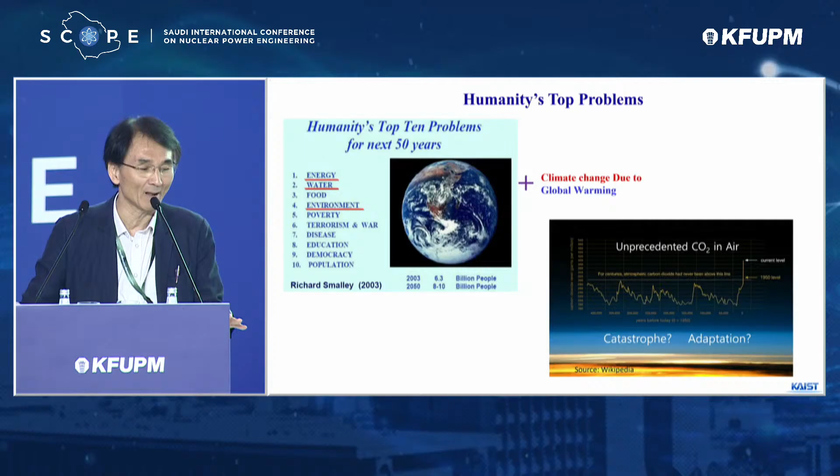So let me begin with the top 10 humanity's problems. As you understand, energy is the biggest problem and issue in the whole world, and the global warming we have nowadays is making it more complicated and more challenging. In addition, people say global warming is triggering huge climate change. I'm not going to discuss this because I'm not an expert here, and also some people say this is quite controversial. But looks like global warming is truly happening, and we have to worry about climate change.

So, in the middle of combating climate change and global warming, many countries are paying big attention to nuclear energy again, announcing, for example, more than 30 countries are trying to triple their nuclear installation. Tripling, not doubling. And more interestingly, the USA announced they will quadruple the nuclear capacity in the US alone. This is a huge challenge, I believe. And believe it or not, every year in China they are adding about 10 big-size nuclear power plants to the grid. I say 10. So it looks like a nuclear renaissance is really coming again.

And the European countries are returning to nuclear, well, except Germany. Hopefully Germany may also change their mind. And the big tech companies in all countries, I believe, but largely in the US—Microsoft, Amazon, Google, and even Meta—they are investing a lot of money in nuclear projects and in nuclear business areas to develop AI and also to construct data centers.

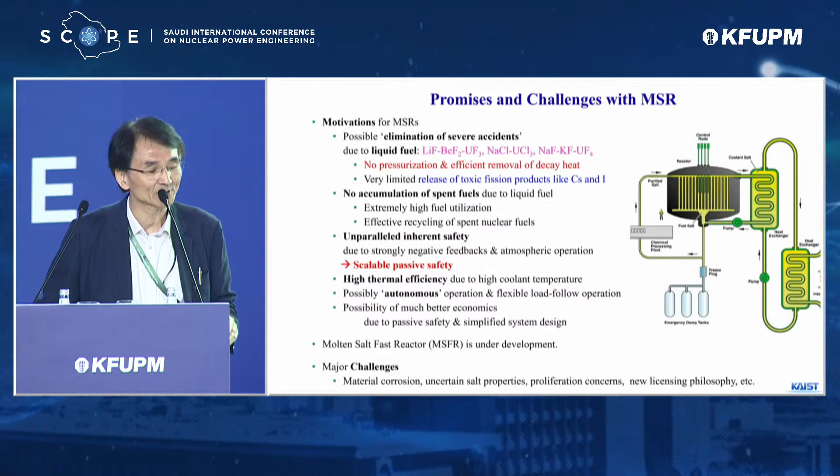If you look at some advanced molten salts, like chloride salts, we need more knowledge about the thermochemical properties of the pure salt itself. It's ongoing research, and there are some concerns in terms of proliferation and operation. So we have to make sure the system design is very much proliferation resistant.

Let me recall a milestone and crazy experiment people did about 60 years ago at the MSRE system in the US, Oak Ridge National Laboratory. They built an experimental molten salt reactor, 8 megawatt thermal, and they made the reactor prompt critical suddenly.

There are a lot more examples, but I cannot discuss all of them today.

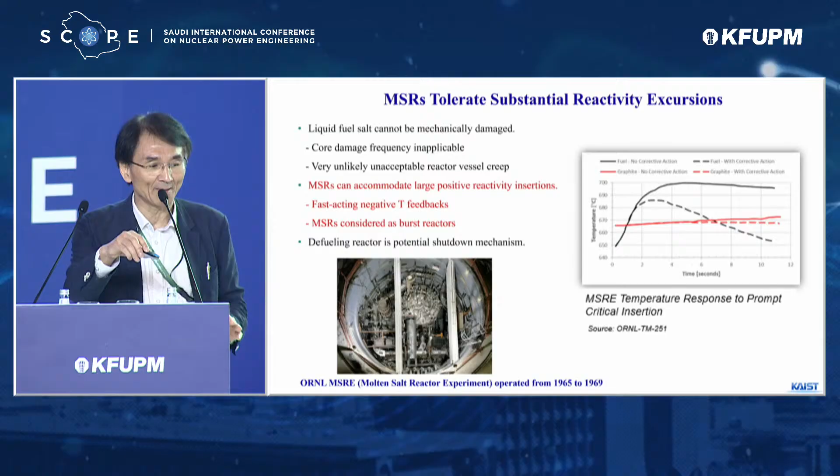The molten salt reactor is basically a thermal spectrum reactor. However, if you recall the requirement I mentioned today, thermal spectrum is not a good idea because we have to make it sustainable, and very effective in terms of resource utilization. For that, it should be a fast reactor.

For the molten salt fast reactor, we need a new salt fuel, which is chloride, not fluoride. Because in the chloride salt, the uranium solubility is much bigger, and we can achieve a much higher conversion ratio. That means we can utilize the spent fuels very nicely. I will show you.

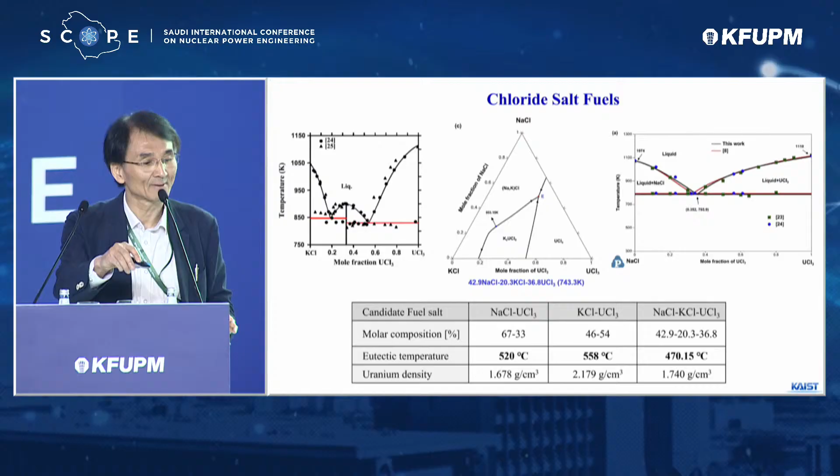Now I will show you our research outcome. We are working on molten salt fast reactor with a closed fuel cycle over the years. My student is just trying to publish this in a journal.

Let's think about the energy potential of the 20,000 tons we have in Korea. If you convert all of this spent fuel into energy, it should be equivalent to the total electricity the whole of South Korea used over 300 years. I say over 300 years—we don't need any natural uranium anymore. And in the US, it can be several hundred years worth of energy resource for the whole country. It's really huge. Fortunately, in the molten salt fast reactor, we can utilize all the spent fuel.

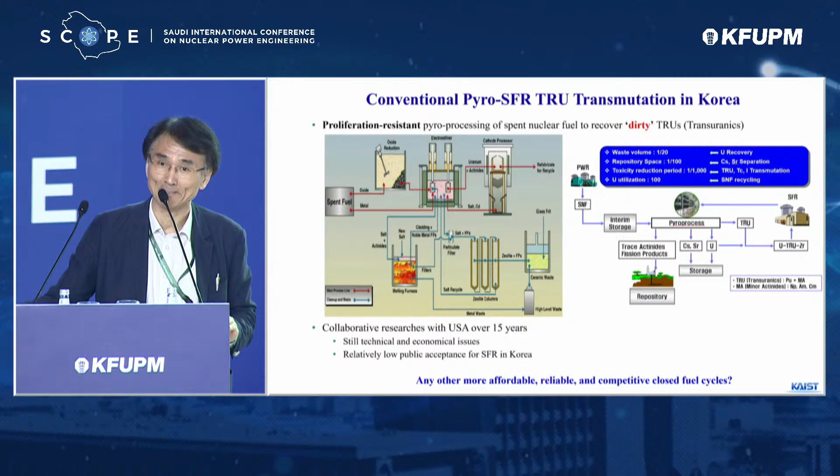So in my idea, we do this way: the LWR spent fuels will be pyroprocessed, and this pyroprocessing will be much simpler than the conventional one I just introduced because we don't need pure TRU. We don't want to just incinerate the TRU - we will try to use this as the fuel for the break-even molten salt fast reactor. So the TRU fraction is only about 15%.

This is necessary only for the very initial molten salt fast reactor, so that way we achieve initial criticality. Once we achieve initial criticality, we don't need TRU anymore because this molten salt fast reactor is supposed to be break-even. What I mean is, in the middle of operation, the fuel is self-generated, so we don't need any fissile fed from outside.

Instead, we just feed dirty spent fuel after reduction, and that is truly extremely proliferation resistant pyroprocessing of the spent fuels. In the middle of operation, we feed a small amount of spent fuel, for example 3 kilograms every day if the reactor is 3 gigawatt thermal, and we have to remove some fission product because to get to the equilibrium cycle, if you think about mass balance, A comes in, then A should get out - so the same amount of fission product should be removed.

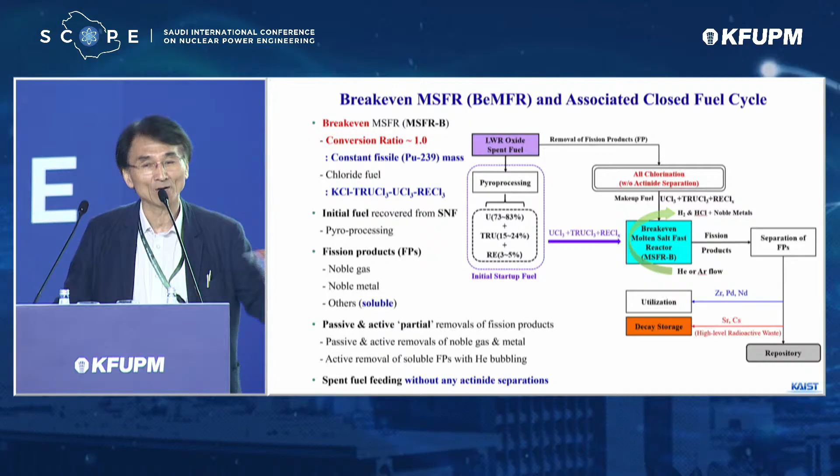So this is the whole cycle we need and we have to carry out. I believe the pyroprocessing will be really simple, could be proliferation resistant, and can be quite economical. The pyroprocessing is necessary to achieve initial criticality, so if you try to design several more of this kind of reactor, you have to pyroprocess some more spent fuels. In Korea, as I told you, we have 10,000 tons of PWR spent fuels - if we pyroprocess that whole spent fuel, we can make about a 3 gigawatt size reactor. That is big enough, actually.

So with this introduction of the molten salt fast reactor, this is the schematic we need in the pyroprocessing. The spent fuel is first reduced - reduction means removing the oxygen. Then in the electrorefining and electrowinning process, we recover largely uranium containing about 15% TRU. This is very simple and I believe quite economically done.

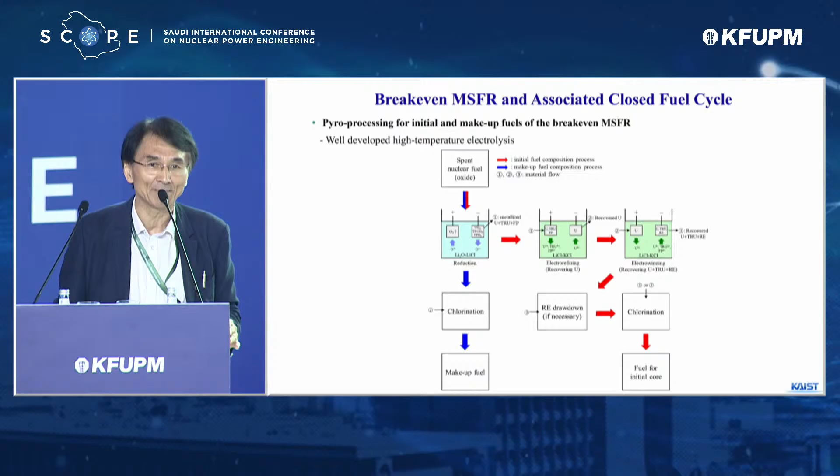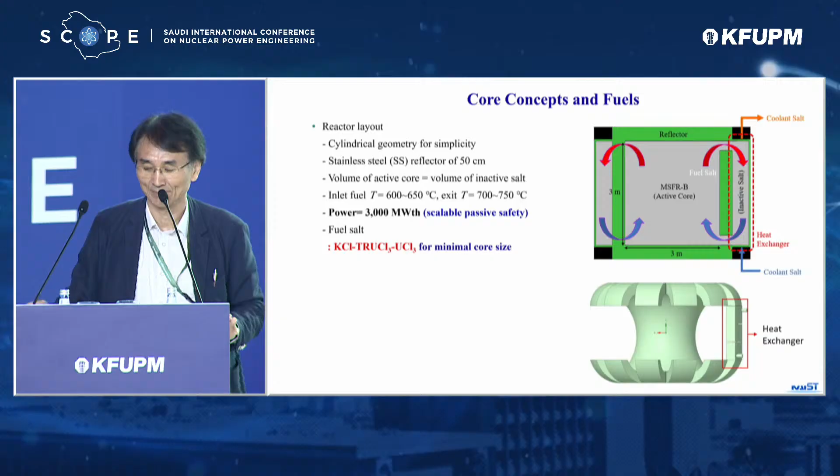So we have designed 2 initial cores, based on binary or ternary compositions. This is just the initial core design. If you look at the composition, the KCl takes about 46% and TRU about 8% in both cases. The reactor diameter is 3.3 meters. The initial inventory of uranium is about 67 tons in both cases, and 15 tons of TRUs in both cases. Please recognize the rare earth is almost 8 tons and 9 tons - we do need this.

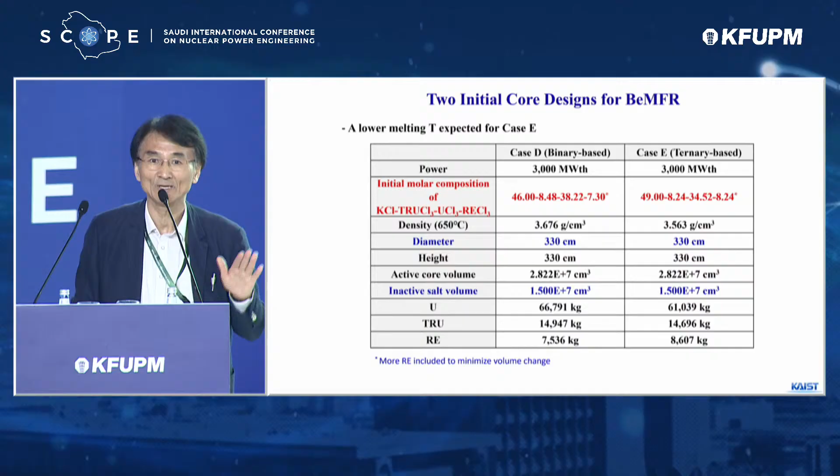So with this initial setup, now we will try to operate the reactor to achieve equilibrium break-even. The starting reactor is not break-even - it's quite close to break-even, but not very break-even. So you should consider a rather special strategy of operation.

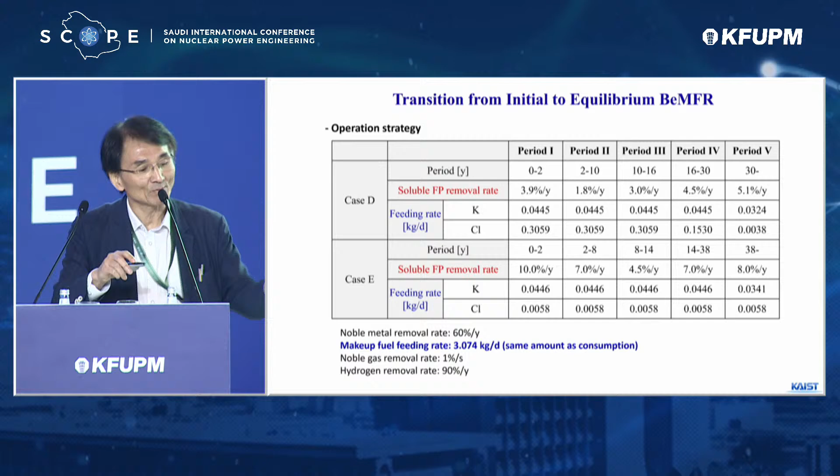So to remove the fission products and to feed the fuels, and also potassium and chloride. So with this kind of operational strategy, we achieve this kind of transition from the initial to the truly equilibrium break-even.

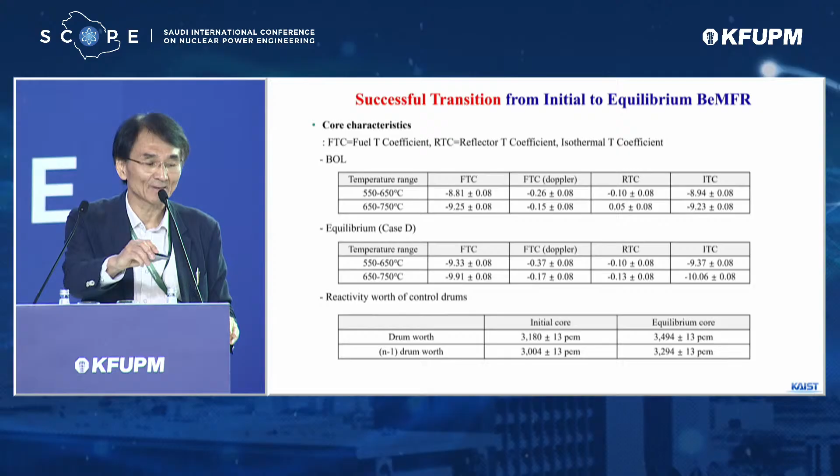And then the delayed neutron precursor, yes, the fuel is circulating, so we have to consider the flow of the precursors, and we do understand there's some loss of the delay neutron precursor, but this is all manageable and doable.

It's about the spent fuel recycling. What about if we have no spent fuels, like Saudi Arabia and newcomer countries?

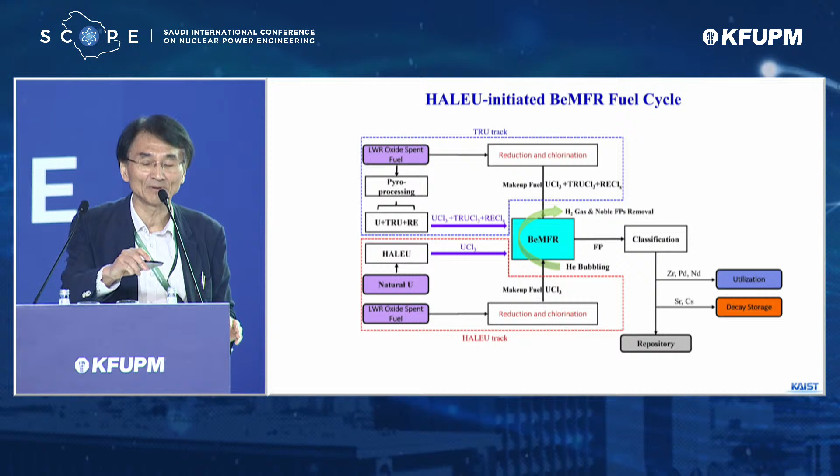Then you can begin with HALEU, the high assay, low enriched uranium. The difference is just in the initial core. So the initial criticality will be achieved using HALEU, and the necessary enrichment is only about 13 or 14%. We do everything else the same way.

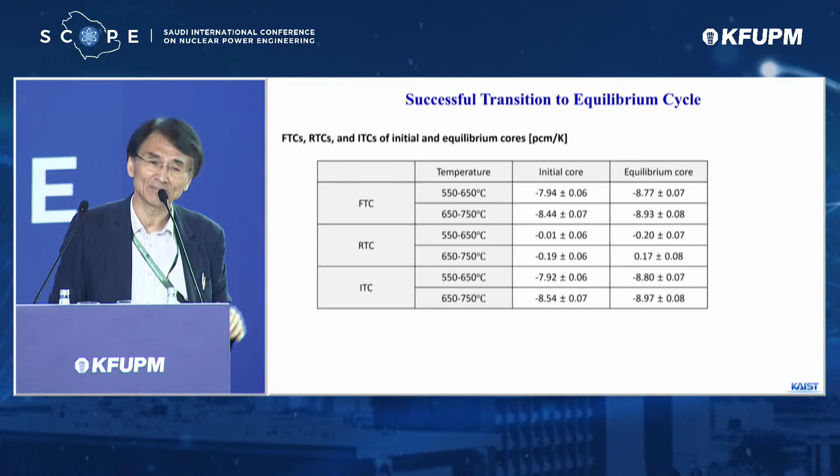And we got similar transition from the initial core to the truly equilibrium molten salt break-even fast reactor. The safety parameters—well, the initial core with HALEU uranium is slightly different, but all good in terms of the feedback. And the delay neutron precursor, again, slightly different between initial and equilibrium, but again, it's all doable and manageable.

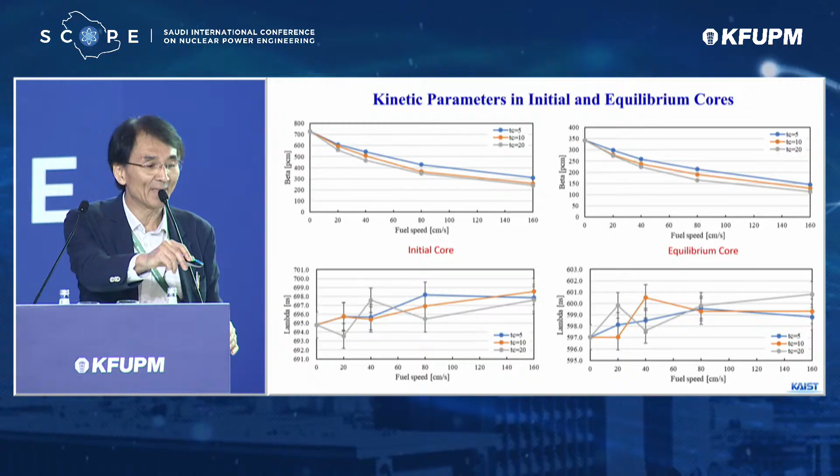So with that, let me conclude my talk here. I believe the spent fuel can be very nicely reused in the break-even molten salt fast reactor.

And the BeMFR can be initiated with HALEU fuel if there are no spent fuels available. So with that, I conclude the BeMFR could be a strategic approach to address the trilemma, or the big issues, in the whole nuclear industry in the world. Thank you very much for your attention.

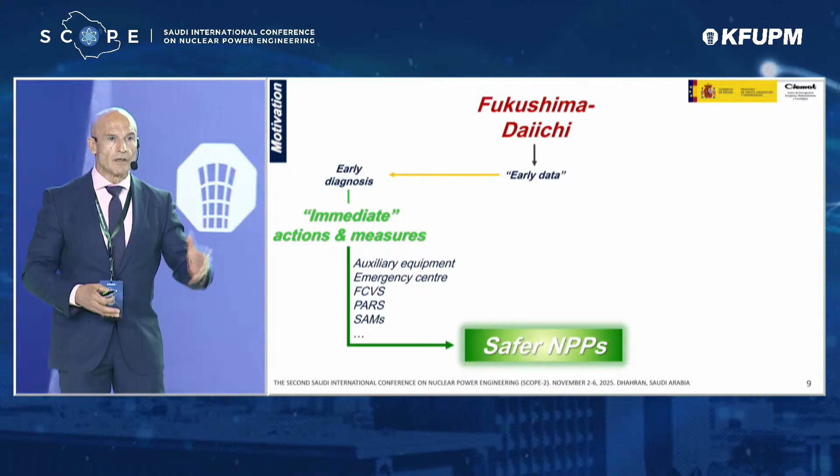We implemented new features such as auxiliary equipment on-site, emergency centers somewhere in the country, new systems like the filter containment venting system, passive autocatalytic recombiners in plants where they weren't installed before, and of course a full review of the accident management guidelines. And this was right away.

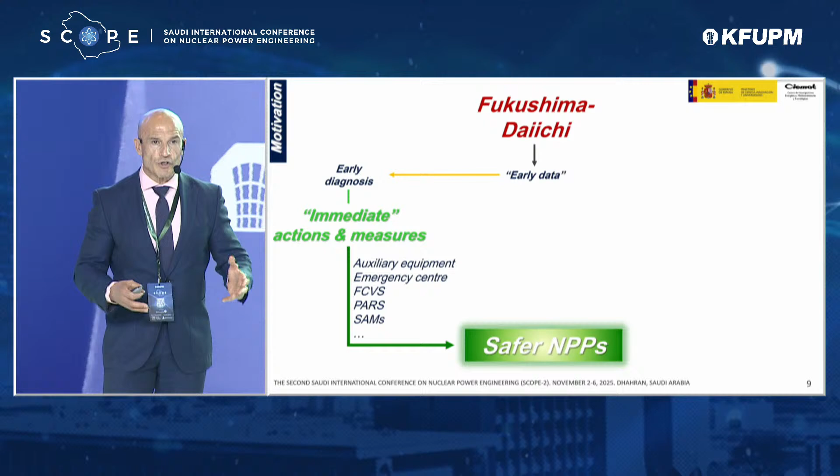But we did something else. Particularly on the research side, we did forensic analysis. I will explain what we mean by forensic analysis for the accidents in the 3 units of Fukushima that underwent the accident: unit 1, 2, and 3. We came up with potential or postulated scenarios that could explain the data we had at the time.

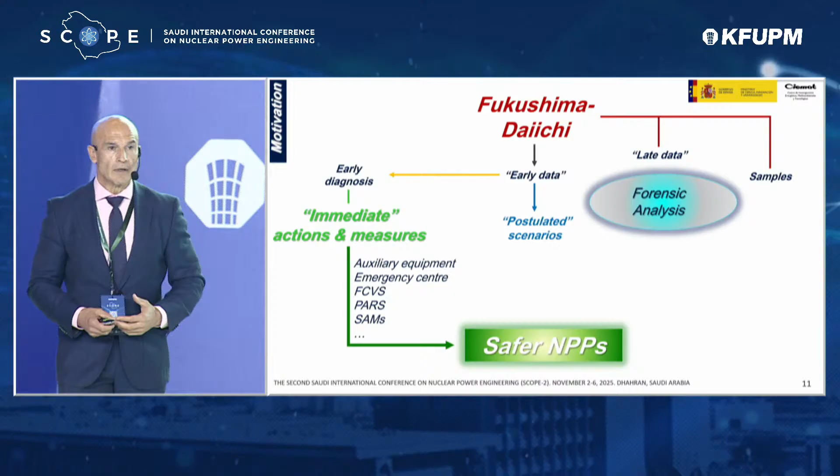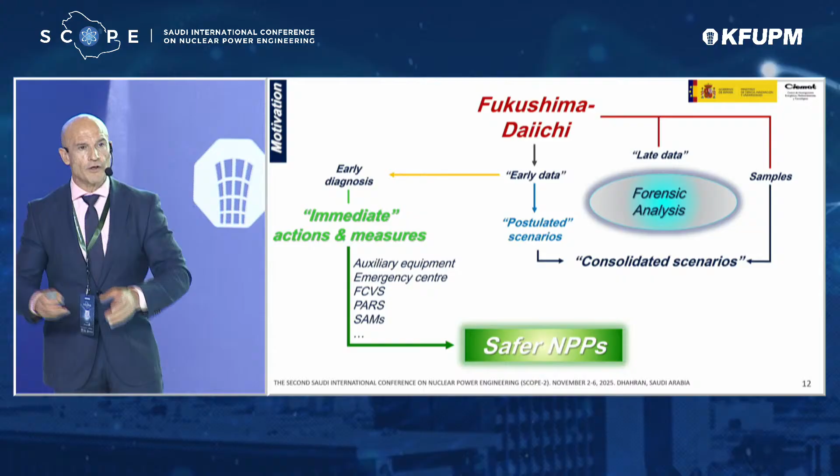But with time, further data came, and even now we are starting to get some samples, of course just a few samples with minimum material. This is helping us in the still-ongoing forensic analysis, because it's very important to realize that by having consolidated scenarios that can explain what happened in the 3 units, one of the things we're doing is testing how efficient the measures we took at early times after the accident would have been, had they been implemented there.

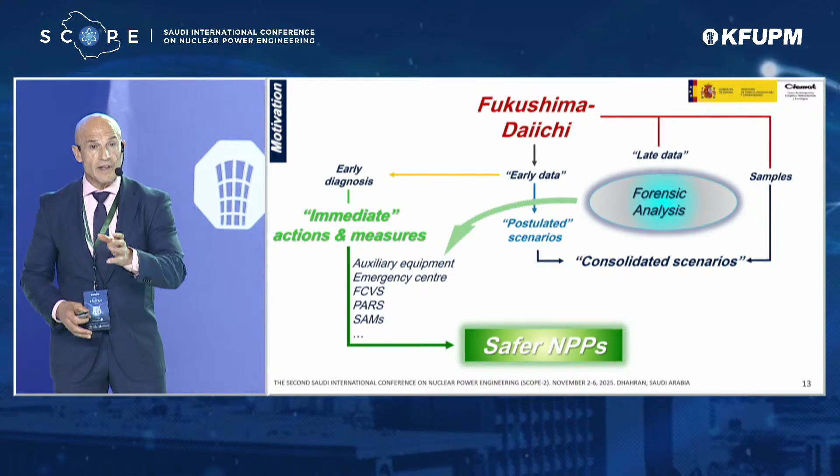Second thing: with the methods we use, mostly analytical tools, we support some of the decommissioning and dismantling, D&D, on the Fukushima site, identifying where the highest radioactive fields might be and where restrictions on human intervention might apply. At the same time, we are reviewing accident management according to what we've seen there.

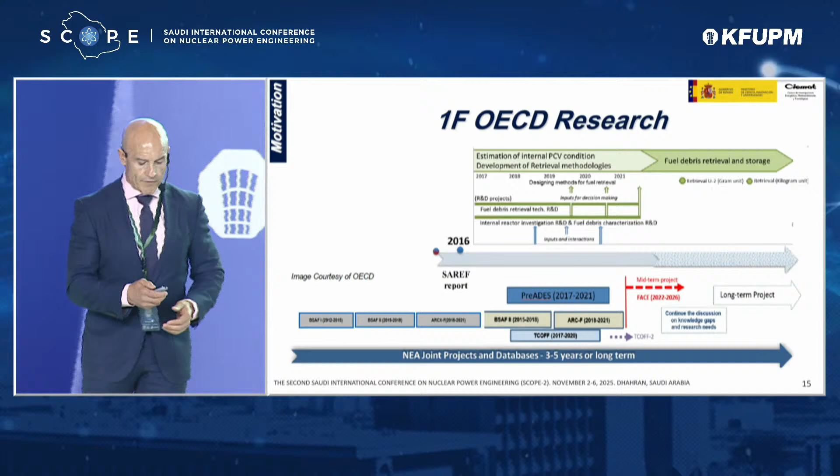One important thing: through all this work, we have enhanced our analytical tools so much, and I'll come to that at the end of the presentation. So, in the end, both by practical implementation of new systems and by enhancing the analytical tools we use, we are making our plants safer. All this work has been ongoing within the OECD framework through several projects I'll mention later in more detail. So let me talk a bit about the forensic analysis, but first let me give a snapshot of how the site is at this time.

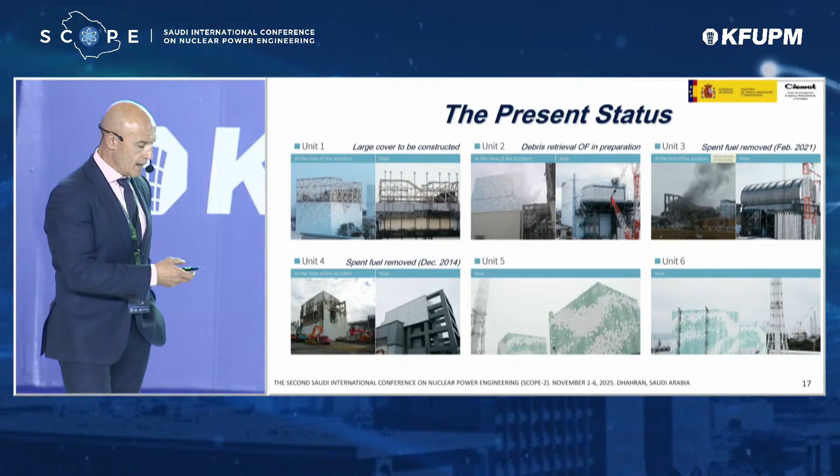First, there were 6 units on site, for those not familiar with the accident. Unit 5 and Unit 6 were in maintenance, no trouble on those 2 plants. But in Unit 4 there was plenty of spent nuclear fuel in the spent fuel pool, which was removed, as you can read here, in December 2014. The spent nuclear fuel pool in Unit 3 was removed just a few years ago, and nowadays they are working to remove all the debris at the upper part of the building in Unit 1 and Unit 2.

Of course, all of them under cold shutdown. This is what we call forensic analysis. Essentially, what we got is target variables - the data we got as early data shortly after the accident, which were the pressure within the reactor pressure vessel, the recording on site, and the pressure in containment.

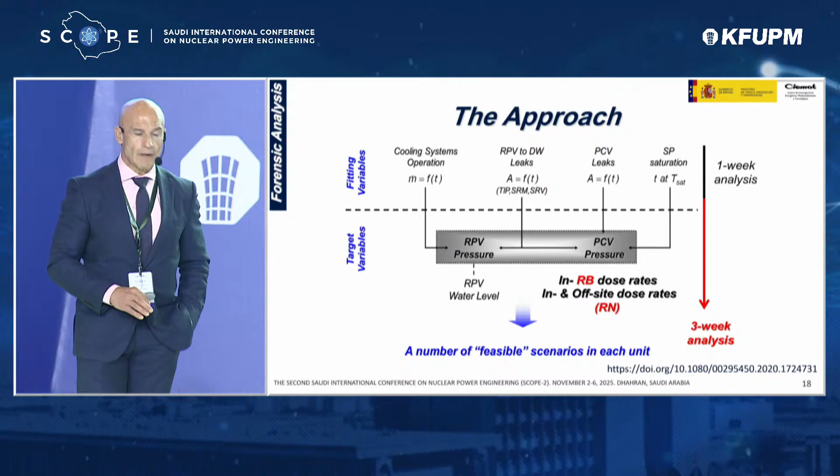Of course, in a discontinuous way. Just remember, this was a full station blackout accident, so we got just two sources of information to build up the whole crime scenario, so to call it, of the accident. But in order to feed our codes, our analytical tools, we need the boundary conditions.

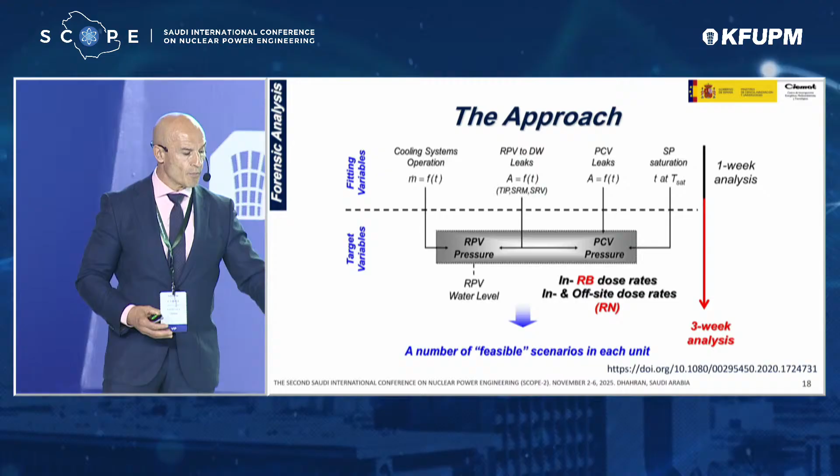And we really don't know what systems were operating as cooling system operation. We don't know about the potential leaks between the reactor pressure vessel or from the containment, primary containment vessel. We don't even know - remember this is boiling water reactor technology with large suppression pools - what is the thermal status of the pool, because if it is saturated, this changes quite a bit the scenario. So there were so many boundary conditions that we didn't have a clue of at the beginning of our analysis.

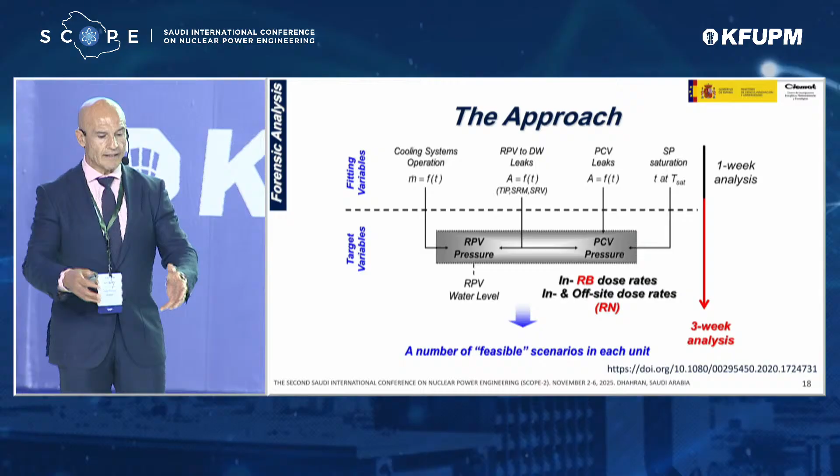So we started building our postulated scenarios just to fit with those target variables. And when I talk about the late data, this means that after a few years, we started to get additional data, like radiation rates in the reactor building or new measurements and sampling, and those data have been integrated. And here it comes where our forensic and our analytical tools have experienced such a big change.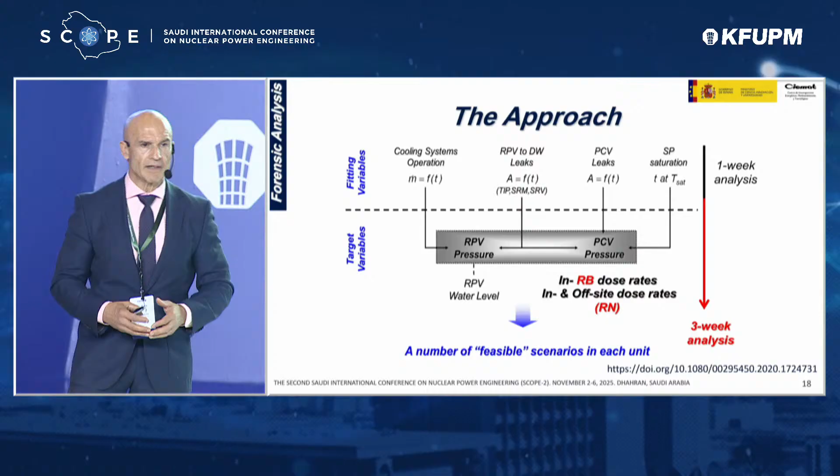Before Fukushima, if you asked anyone to do a severe accident analysis for a PSA study, I'd say they would calculate a couple of days - 48, or the most generous ones maybe 72 hours, no more than that. Running a severe accident code for 72 hours is quite a challenge.

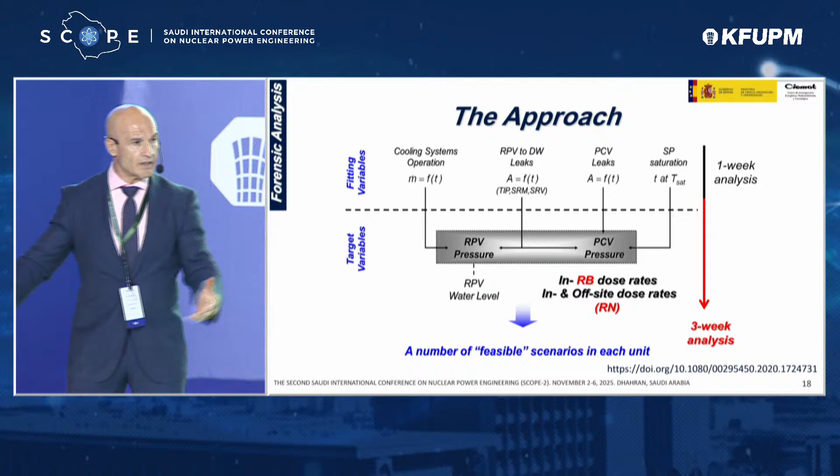In severe accident analysis, there are processes that are so fast, while others are so slow - processes ongoing over 2,500 degrees, and processes ongoing at 100 or 150 degrees. And you need to solve all those equations all together. So it was really hard.

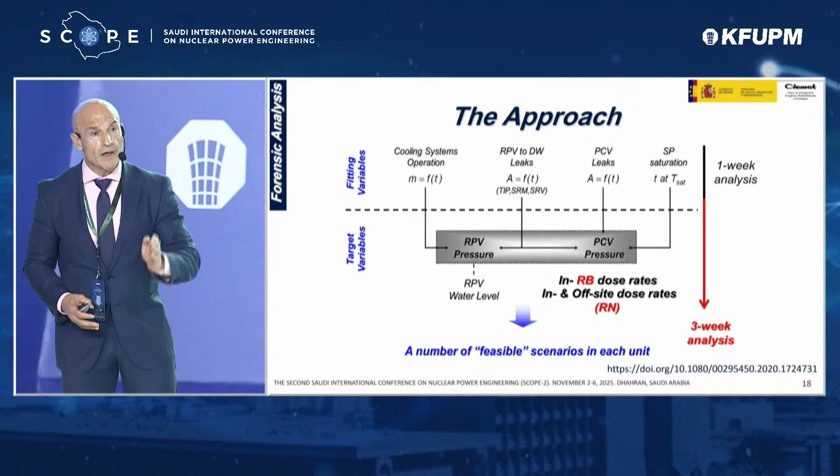I can tell you that after the second phase of the BSAF project, we were capable of running our analytical tools for three weeks in a row, because for three weeks in a row, there were phenomena ongoing either in the reactor pressure vessels or in the primary containment vessels. This is what we learned with our forensic analysis.

You got all the things listed there. I won't go one by one, but I want to spend a minute on some of them - those more representative of what the forensic analysis brought into the understanding. For instance, in unit number 1, I remember when we discussed with TEPCO people, who were always willing to share their data, they provided us with the injection rate in unit number 1.

They gave us a schedule and flow rate, and this brought us to a completely different picture of the data recorded. So the analyst said, well, there's no way you injected water at that time given the data for the RPV pressure. Then what happened is they confirmed that water came from the fire truck and was injected into the plant. However, it never got to the reactor, nor to the primary containment vessel.

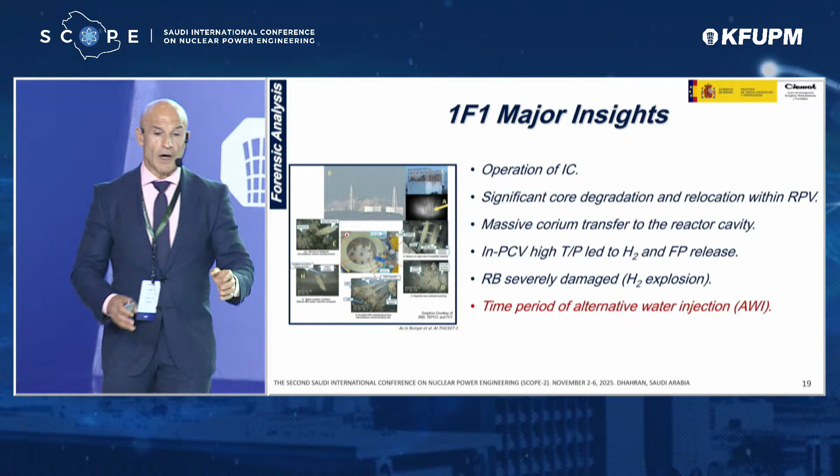It went somewhere else. So the first massive water injection happened 10 days after, and this was first found out by our analytical studies. Then in the second unit...

We did our first calculations and predicted a pressurization rate in the containment that was much sharper than what they recorded. Heat transfer correlations have been known for quite many years, so there couldn't be such high differences. We were very certain there was a 20-30% uncertainty or error in our heat transfer correlation, but no more than that. But according to the data, the difference in pressurization rate meant much higher differences in temperature.

So we came up with the intention of increasing the heat transfer coefficient. We imposed this in our analytical tools, and we came up with the idea that somehow something happened that cooled down the containment much faster than expected.

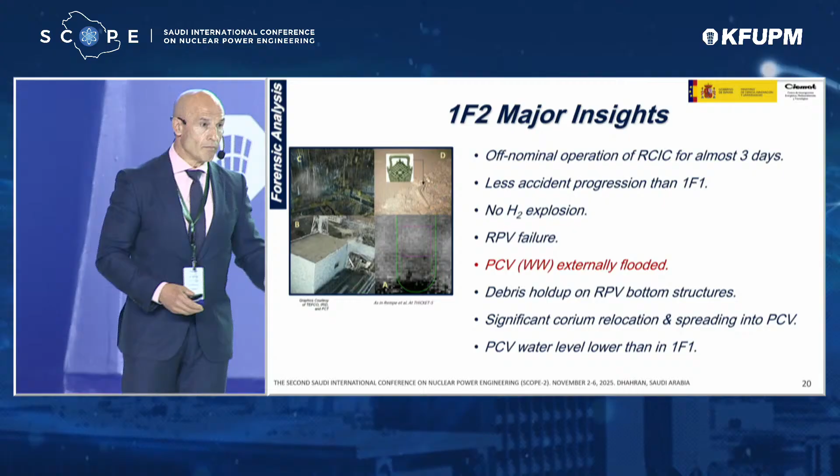What happened is that after a couple of meetings, our TEPCO colleagues came and said, you were right, because in unit number 2, seawater flooded the basement of the reactor building. This was the reason why the heat transfer coefficient was much higher - the heat removal was much higher.

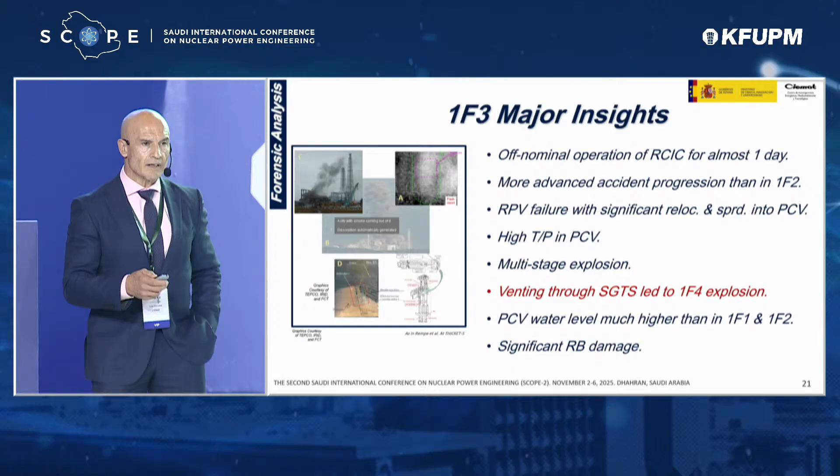So I could give you some more examples like that, but it's just for you to realize that this analytical understanding is quite important.

In unit number 3, it was operating when the tsunami came into the plant, but unit number 4 was not. However, there was a hydrogen explosion in the reactor building of unit number 4. I remember the times we spent quite long calculations just to try to justify what could be the source of the combustible gas that made unit 4 explode.

After a while, justifying that it was impossible to generate that hydrogen radiolytically or by chemical reactions, we came up with the explanation.

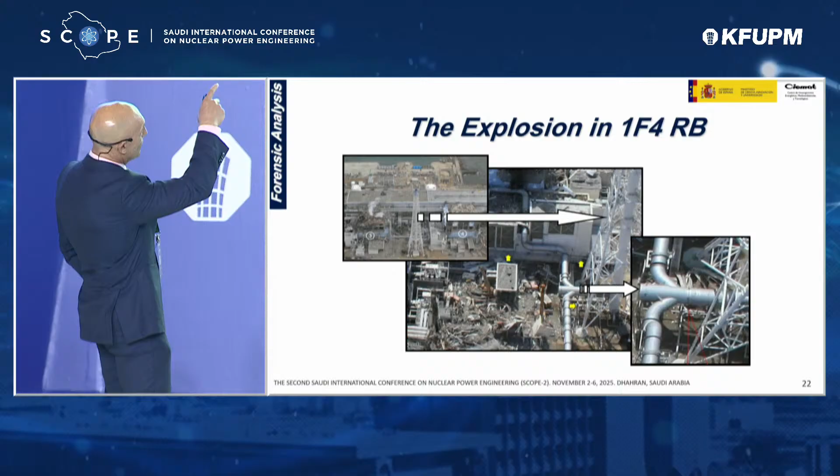As you can see in the center picture, unit number 4 is the one at top, unit number 3 is right there, unit number 4 is right at our side. There is a joint piping going to the common chimney of the standby gas treatment. What happened is that the venting of hydrogen in unit number 3 pushed gases into the unit number 4 reactor building through this T-junction and caused an explosion in unit number 4.

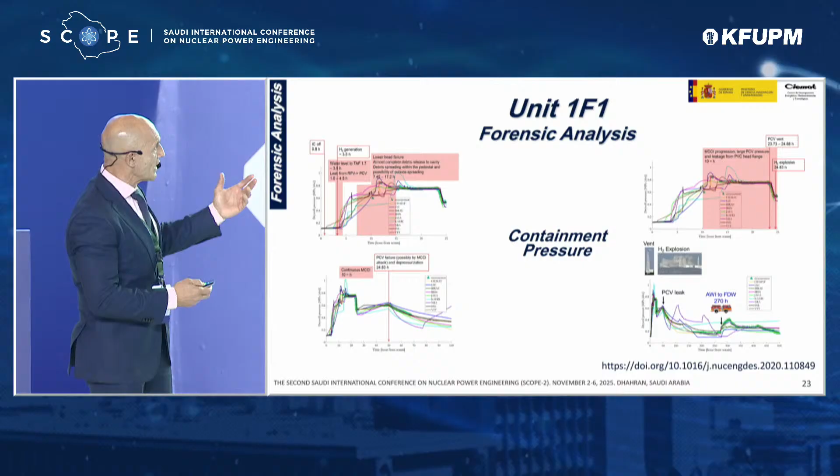This was also confirmed with our forensic analysis. These are just a few plots with references for you to check if you want more information. I'll be around here, so I'll be happy to answer any questions you may have.

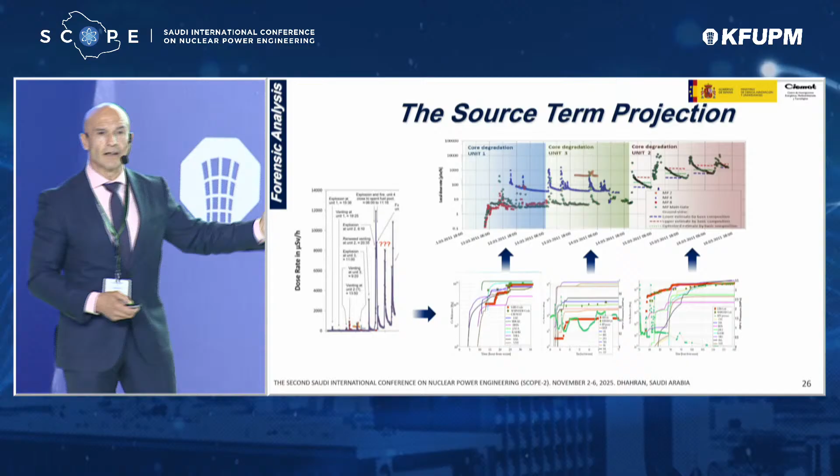We cross-checked it with the predictions and measurements of dose rates outside the plant, identifying when our codes were predicting those releases of fission products, and we identified the sources from unit by unit along the time.

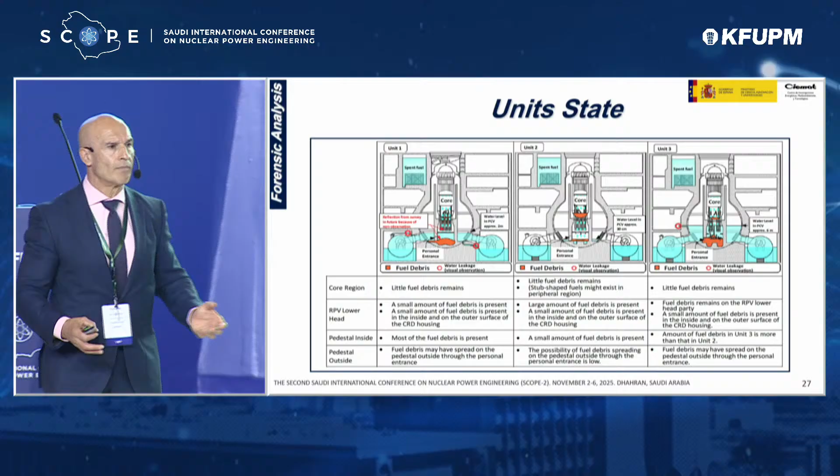This is the current status, and in global terms we match it with our forensic analysis what the TEPCO people afterwards have measured. Essentially, in unit number 1 most of the core melted down and is in the reactor cavity. Much less of that in unit number 2, with less interaction of these hot materials in the pedestal of the unit, and in between in the case of unit 3. So neither everything nor the amount in unit number 2, just in the middle.

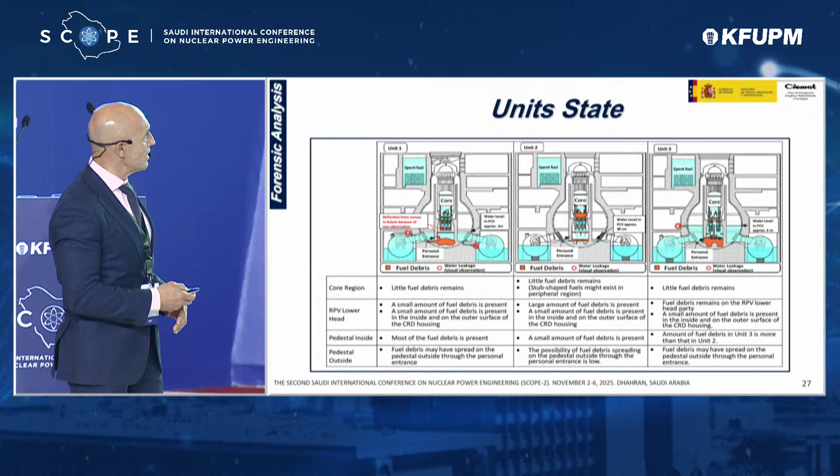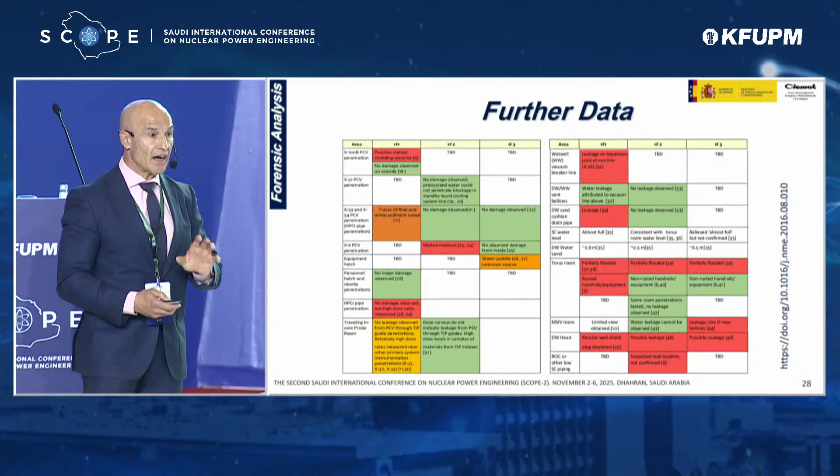This is a table with the late data that came after, confirming some of the insight we gained with our forensic analysis, just for you to have it.

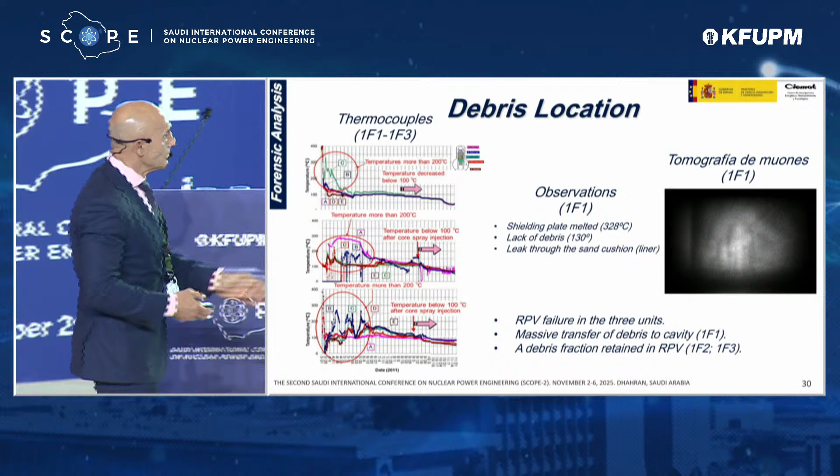One example of those data: one of the things we did was to cross the measurements on the left-hand side, the temperatures in the reactor core at different locations and how they decrease with time, with the muon tomographies we were taking, just to confirm that in unit number 1 there is practically no fuel remaining, meaning that everything has gone into the pedestal, while the other two are in a different status.

The ongoing investigation is, of course, targeting those things that we don't understand, that we know we don't understand. One of them is the late phase of the core relocation.

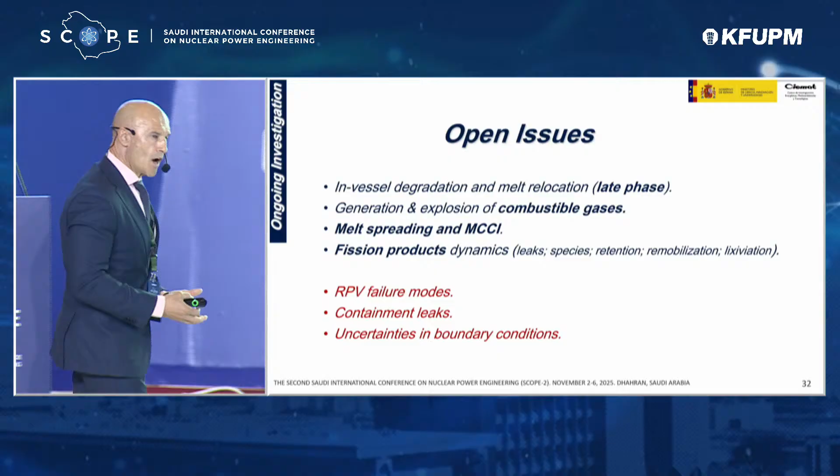This is when the molten materials move within the reactor. We know this because we had to fit our codes by stating at what times and how much core material, lumps of molten material, slumped into the bottom head to reproduce the pressure peaks in the reactor pressure vessel. But we did so ad hoc, so there is no good model for the late phase.

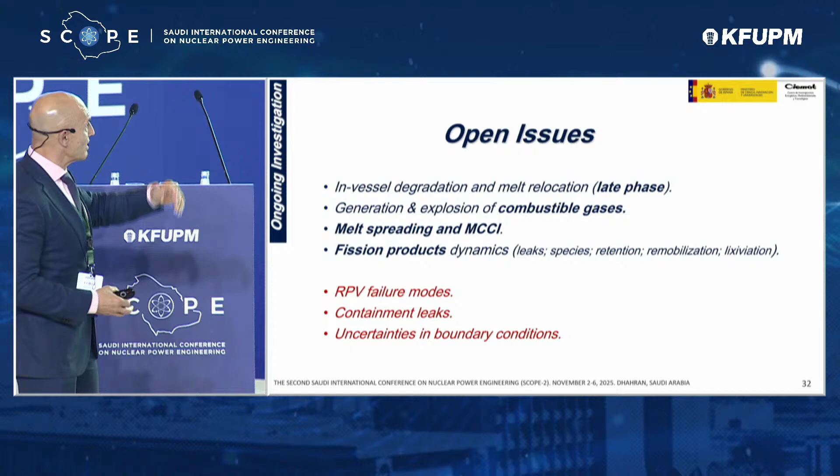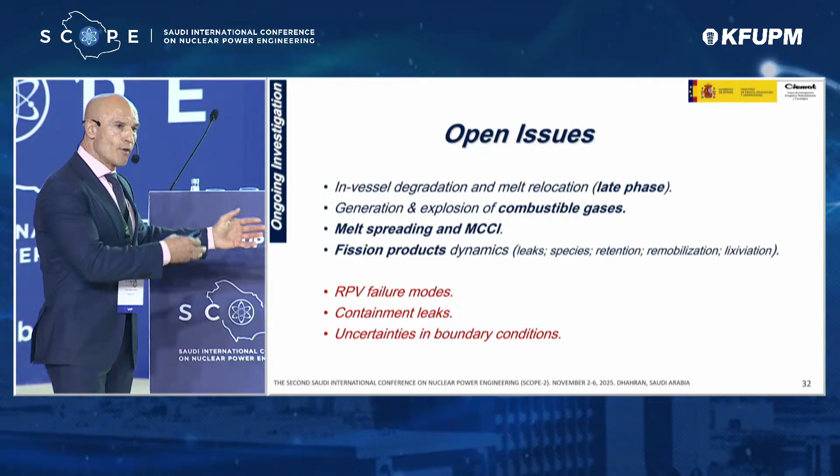But the most important thing you're going to hear me talk about is that we need to know the mechanisms to fail the barriers of the defense in depth concept - the reactor pressure vessel failure modes, the containment leaks, and most important of all, those uncertainties in the boundary conditions: what were the actual flow rates coming in, what were the temperatures of those materials getting in at the time of injection. These sorts of things are helping us.

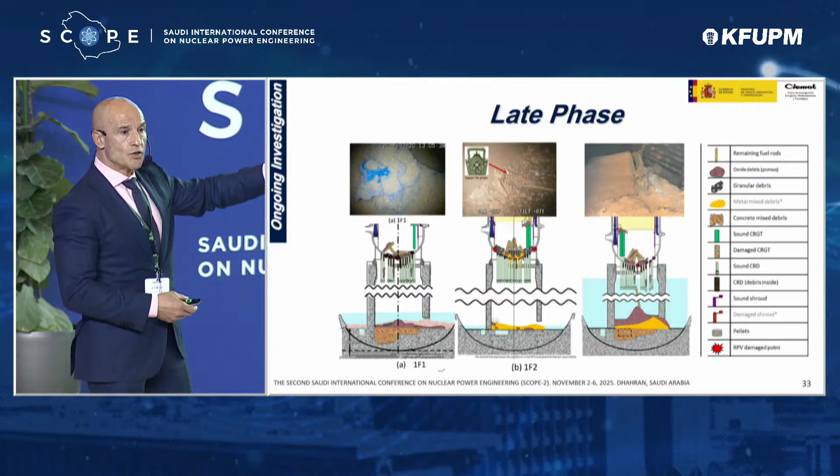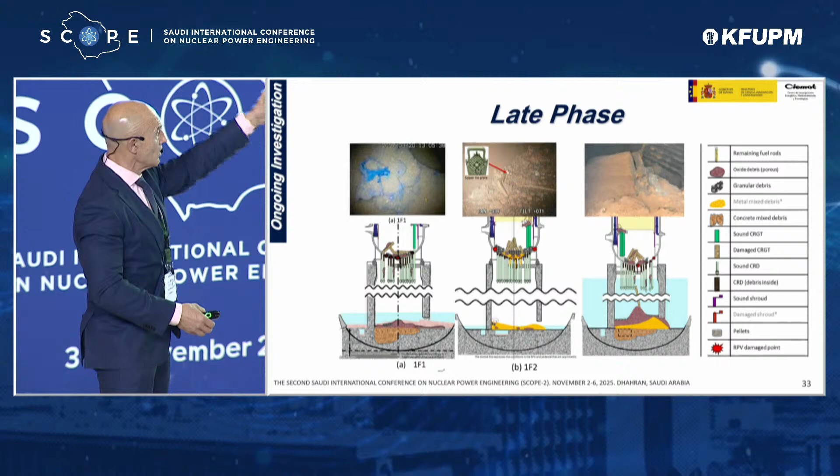In our codes, in order to get any material from the reactor pressure vessel to the pedestal, we need to melt it all and go in there, thermally damaging the bottom of the reactor pressure vessel, and in molten or debris status, move down to the pedestal.

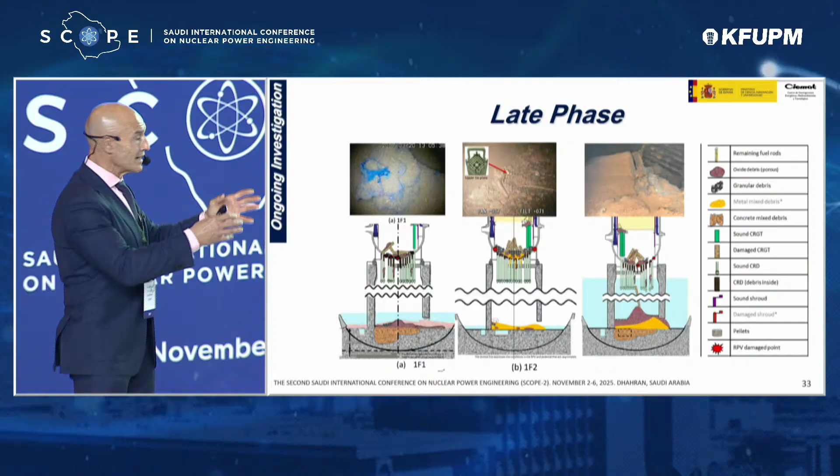Impossible to have that piece going through. This meant that a big hole appeared there at some point during the accident that our codes, as they are written today, are incapable of predicting. This is why in projects like TCOFF or TCOFF-2, we are looking at the structural materials and ternary systems that might form, because it might be the case that a hole opens at some point—this is just a hypothesis—and lets material through, and then mixtures of materials can form and clog the hole.

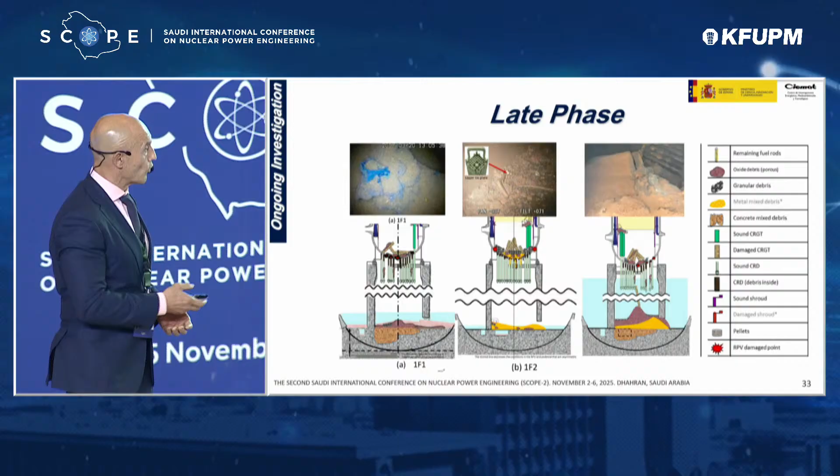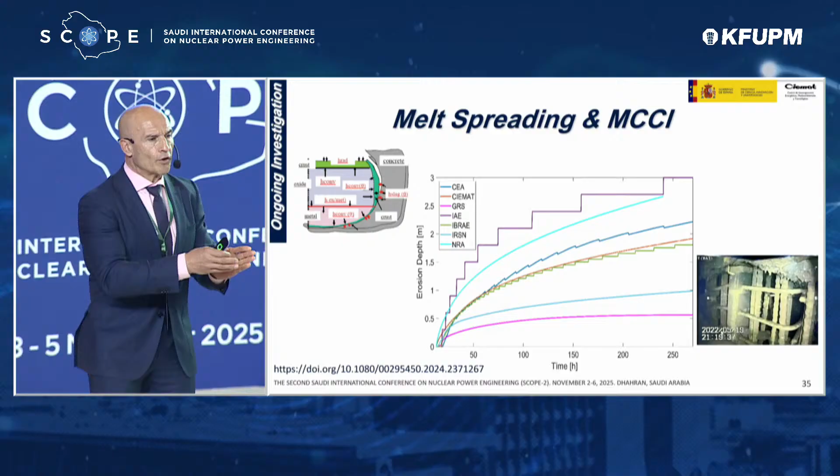After forensic analyses kept on the ARC-F project, we found that when you go beyond a few days of this interaction, it's very important to consider the thermal conductivity through the concrete, because by that time the decay heat has lowered so much that conduction through the concrete becomes important. We've tested that by introducing the thermal conductivity of the concrete, we reach the steady state that was observed.

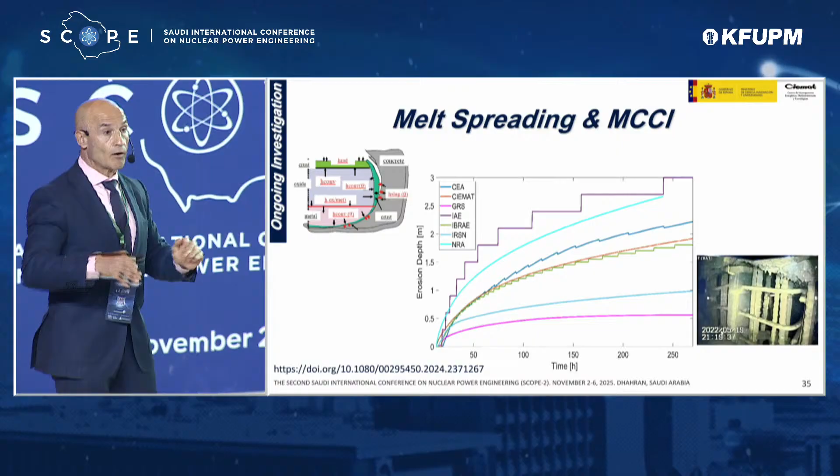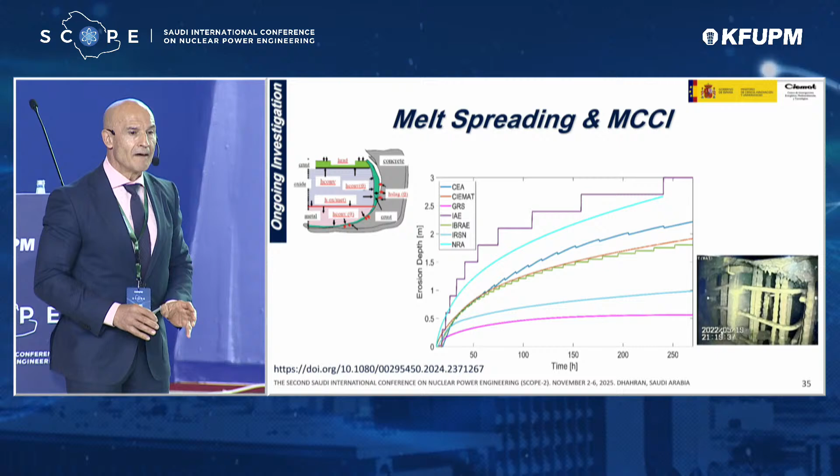But what is still impossible to explain is the cavity you see in the picture on the right-hand side—essentially meaning there is no concrete around the rebars, and the rebars are intact, not brand new, but mostly intact. We don't have any explanation for that either. We are working on it, but in our codes there are no models that can explain this.

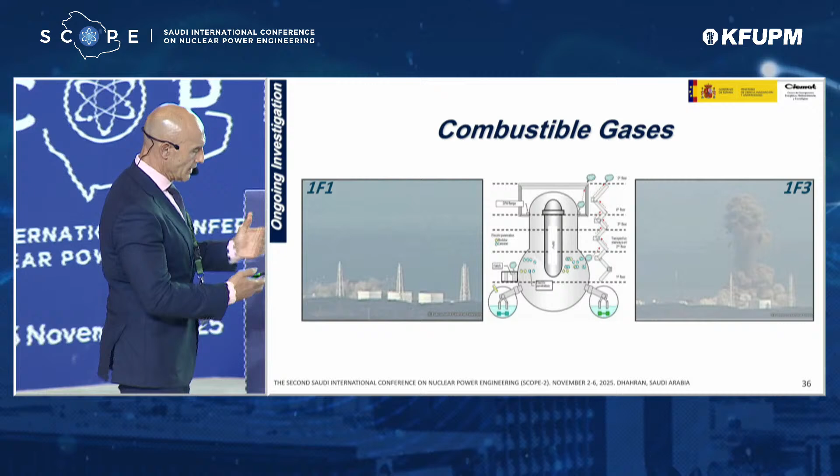Coming to the explosion in unit number 1 and the explosion in unit number 3 — in unit number 1 it's a kind of flat explosion, white color. Unit number 3 is much more vertical, a two-stage explosion, and though you don't see it clearly here, with a kind of orange color as well. So they were different, and we now have hypotheses to explain these differences, but they're still to be proved. We have two options to explain it.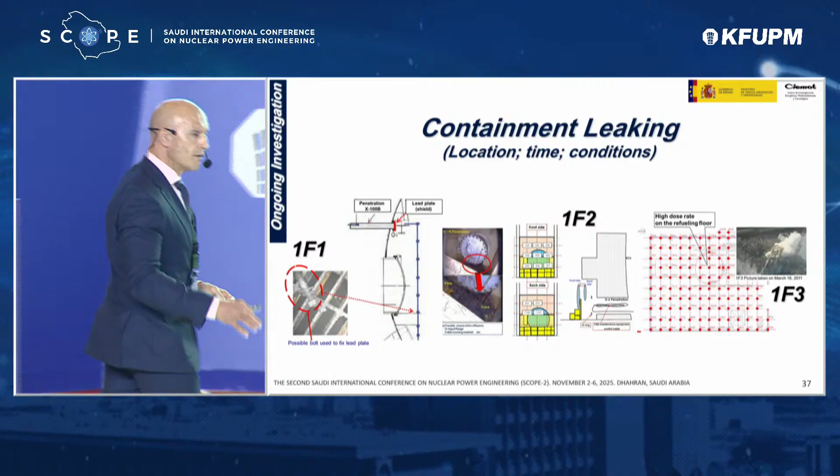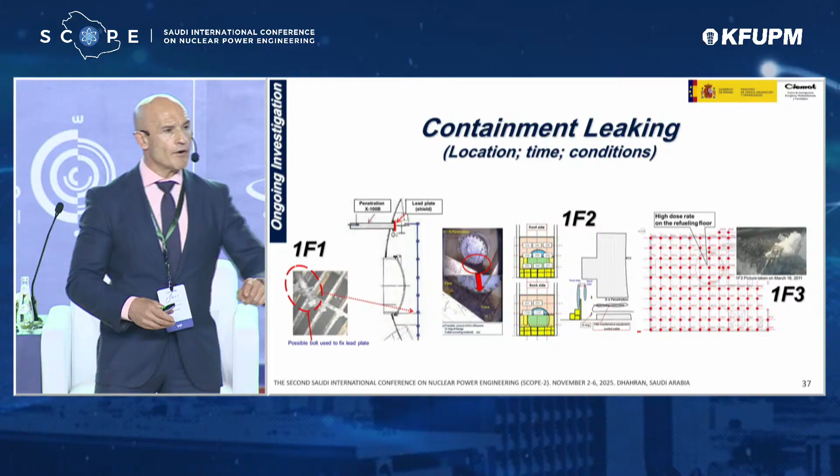Now coming to the leaks—let me give you an example of how important it is to know the leaking conditions. When you come to our models, and we are researchers, we love sophisticated models, CFD or lumped parameter code, never mind—we like a lot of sophistication in our modeling. The problem is that it comes to a point where your model might be as good as you want, but if you don't know the boundary condition, you get lost. The boundary condition becomes so important that in unit number 1, if we assume just a small leak between the RPV and the PCV, that is much more important than any uncertainty you might have in the pool scrubbing modeling of the suppression pool.

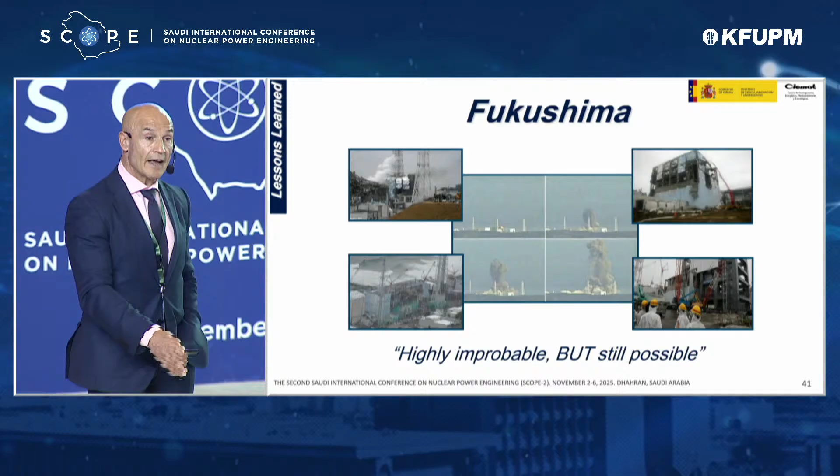So let me come to the lessons learned, because so far, if you crystallize those insights we've gained, there are things still ongoing. First lesson to learn: in our running reactors, a core damage reaction is highly unlikely, no doubt, but it's still possible. And this comes from my side—nuclear technologies should be ready as if it were going to happen right in the next minute. This brings education and training into place.

Looking at the whole picture, one of the major points has been how important it is to have independence between the regulatory body and the nuclear industry.

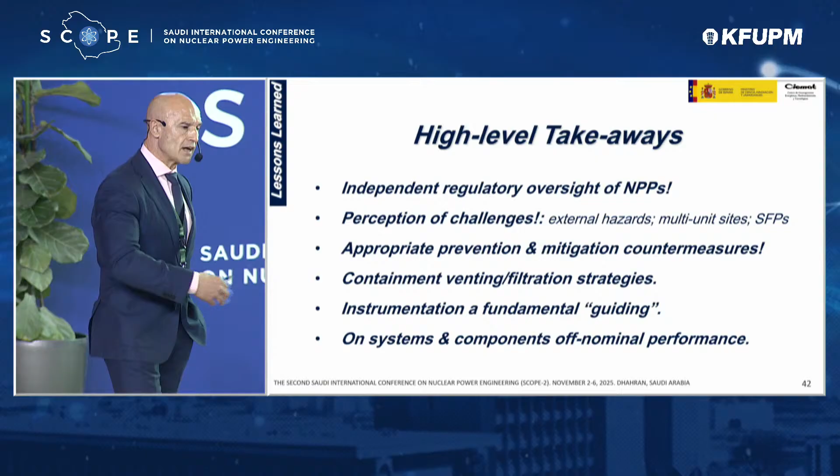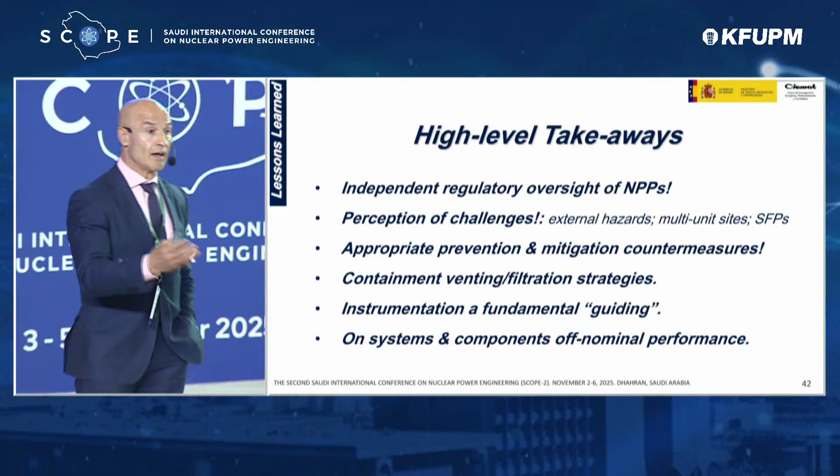The perception of challenges—if I can share how we lived this in Spain, at sites with a couple of reactors: if you went there and discussed this before Fukushima, with two reactors, they would say, if I got a core damage reaction in one of those reactors, all the equipment in the other reactor will help them. Well, this holds if the threat doesn't come from outside and you don't have both units undergoing an accident. So just the potential of external hazards at multi-unit sites has changed the whole concept.

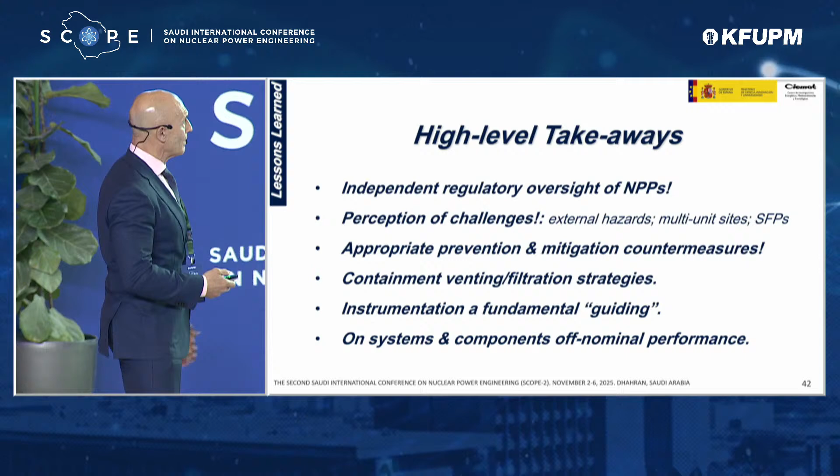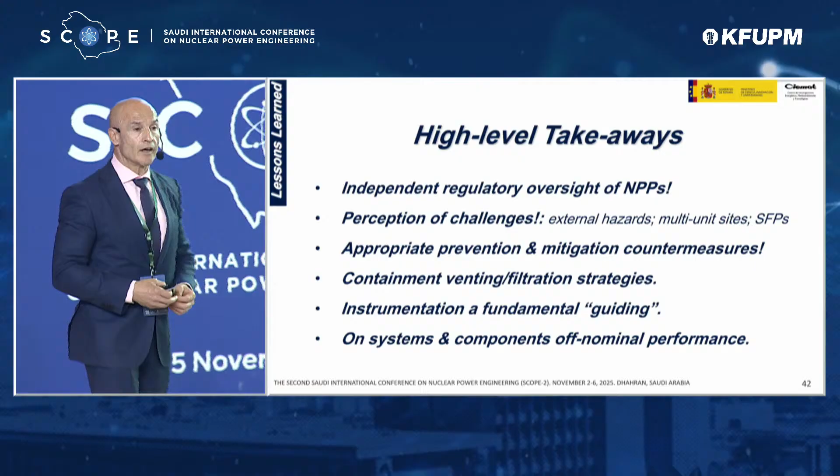And we put so much care into mitigation and prevention. Just to recall, passive autocatalytic recombiners that were not installed in Europe have now been installed throughout our nuclear power plants, as well as passive filtered containment venting systems.

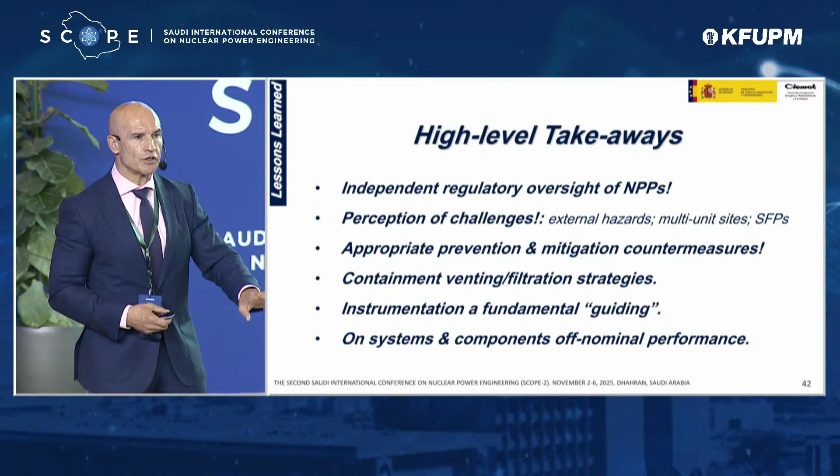It's very important—I didn't mention that in unit number 2, the reactor was cooled for nearly three days without any safety injection, just with a system that was there for shutdown operation. The RCIC, the reactor core isolation cooling system, was capable of working off nominal conditions and providing good cooling of the unit number 2 reactor.

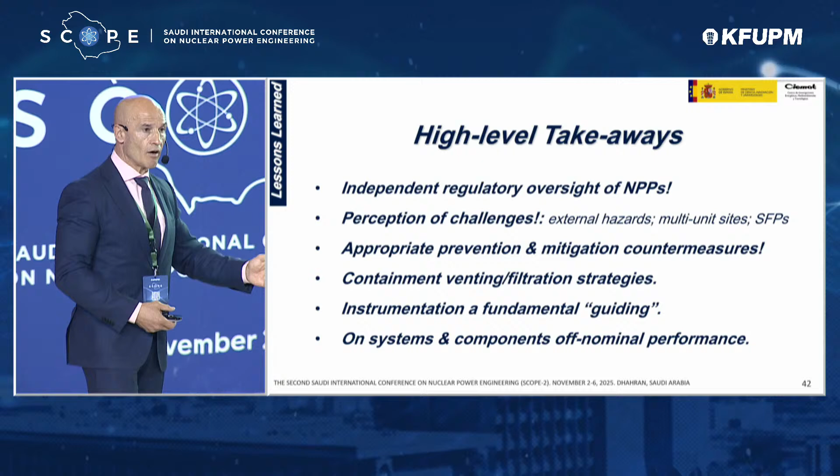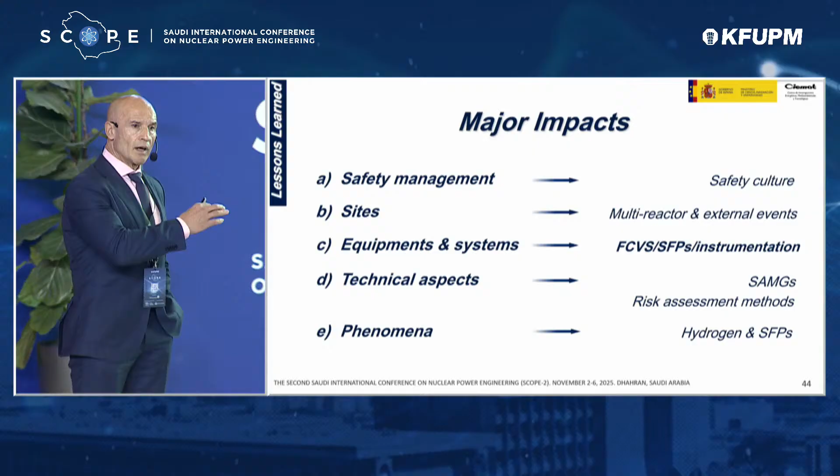I think I can skip this. I already mentioned in previous slides that the impacts happening after Fukushima go in very many layers, from safety culture to specific phenomenology, through a rethinking of risk assessment methods and accident management guidelines.

To me, and this is controversial, not everyone shares the same opinion, the water management we saw in Fukushima was exemplary. They faced a challenge never expected in terms of the amount of water, and they handled it very well.

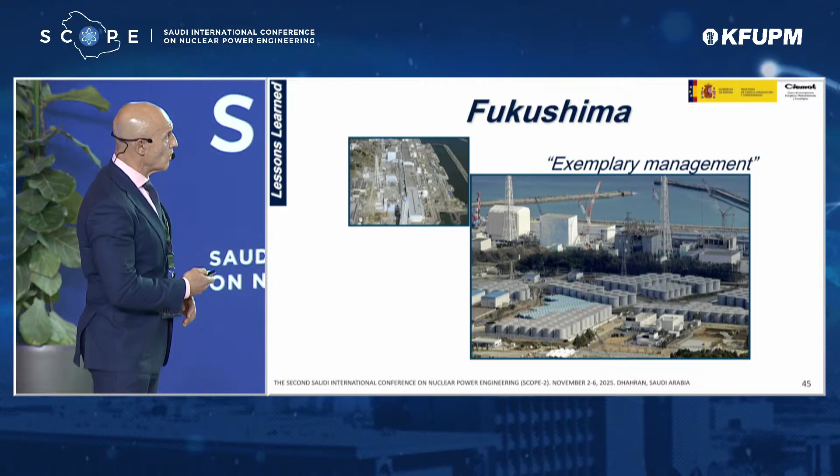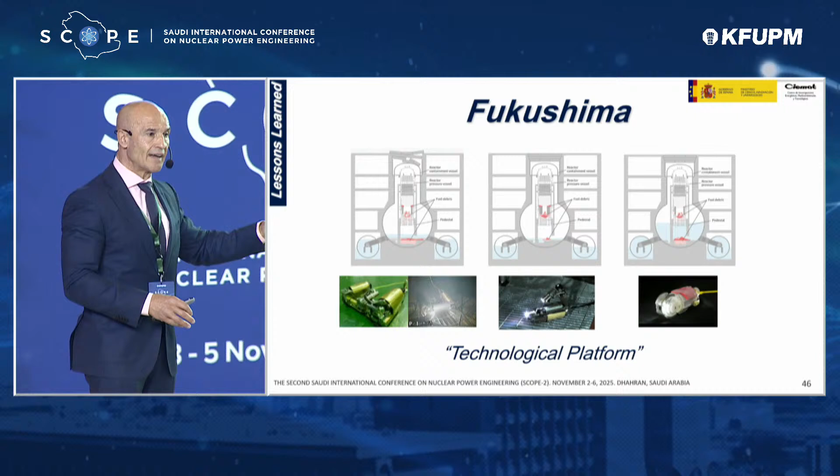Also, because of Fukushima, some technology is being developed. I'm talking about robots built to withstand high radiation fields, some flying, some moving around, some diving in pools, just to grab samples and provide further data to keep consolidating the scenario I mentioned in the previous slides.

And that is all I have for you today. Thank you for your attention.